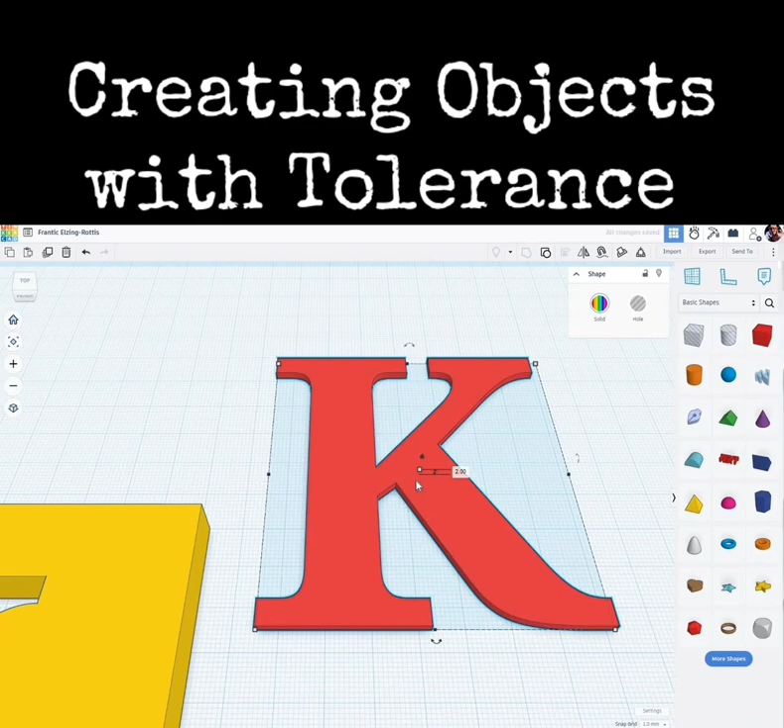Let's take this red part. Let's bring it out here. Let's move this yellow part for a moment. We want to turn this into an SVG so we can work with it. Going to make sure that's on the work plane there. While it's selected, I'm going to click Export.

Select SVG, and I'm just going to leave this oddball name here. Move that out of the way. I'm going to click on Import. I'm going to grab that SVG that I just made. I'm going to import that back in. Okay, there we have that.

Now this is exactly the same size, so at this point it still won't fit. So what we're going to do is first we're going to change the quality of this to 24. Now we're going to make a couple of duplicates to be able to trim some of this off. Now some of you might say, well, we can just take this letter and shrink it down. Well, I'm here to tell you that doesn't work, because if you start shrinking it, the scale doesn't fit. It just doesn't work right. So let's undo that. Let's bring it back over here.

All right, we're going to make a couple duplicates of this. So I'm going to select it. I'm going to create my first duplicate. There's my first. I'm going to turn that. I'm going to change the fill mode here. Now I want to make two of these here. The first one I'm going to call an outer line. I'm going to change this to, say, 0.25 millimeter.

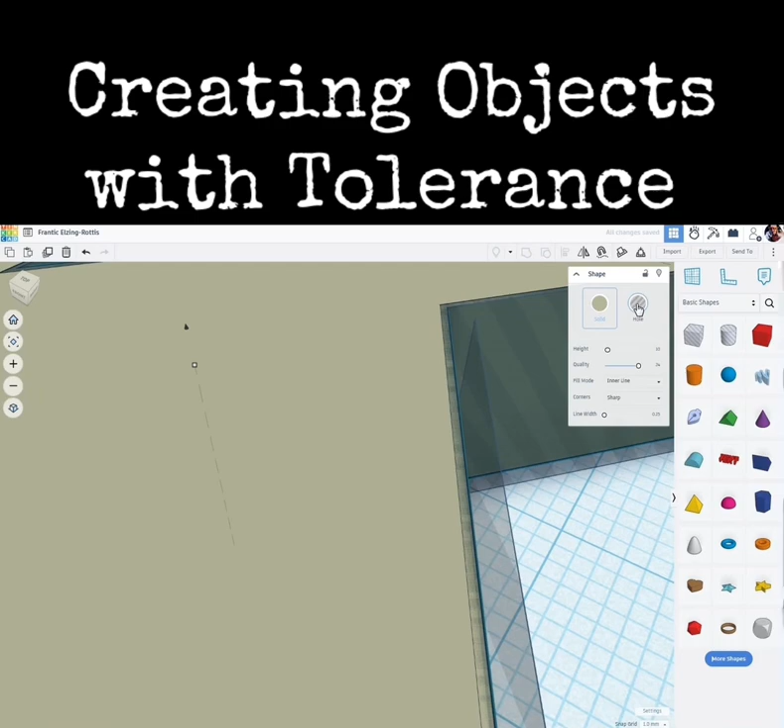And if we zoom in here, you can see our two parts. Here's our outer line. If I make that solid, you can see it. Here's our inner line. Zoom back out. I'm going to select all three of these. Going to group those together.

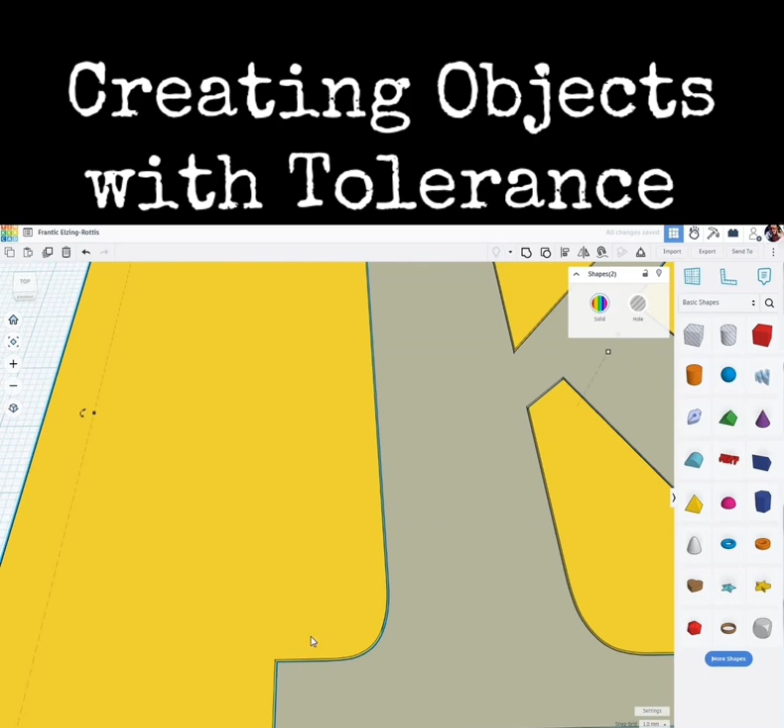There we go. Now let's realign it with this one. Okay, let's grab both of those, bring them over. Now if we zoom in here, you can see that I've built in a tolerance of 1/4 millimeter so that if you were to print these, they should slide together.

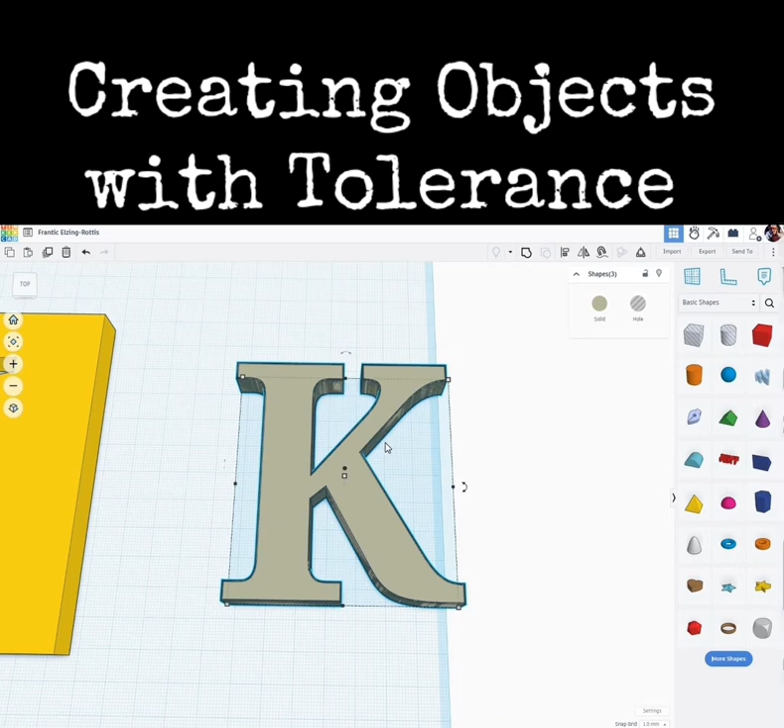Now, I want to show you the reason that I created that outer outline. Let's bring this back over here. Let's ungroup that for a moment. If you don't create that secondary outer outline and just do the inner outline, let's delete the outer one here, you'll see you end up with some really odd remnants. So this one is just our original K shape and the inner outline. And if you zoom in here, you see all these weird little remnants that get left behind. That's why I did that secondary outer outline.

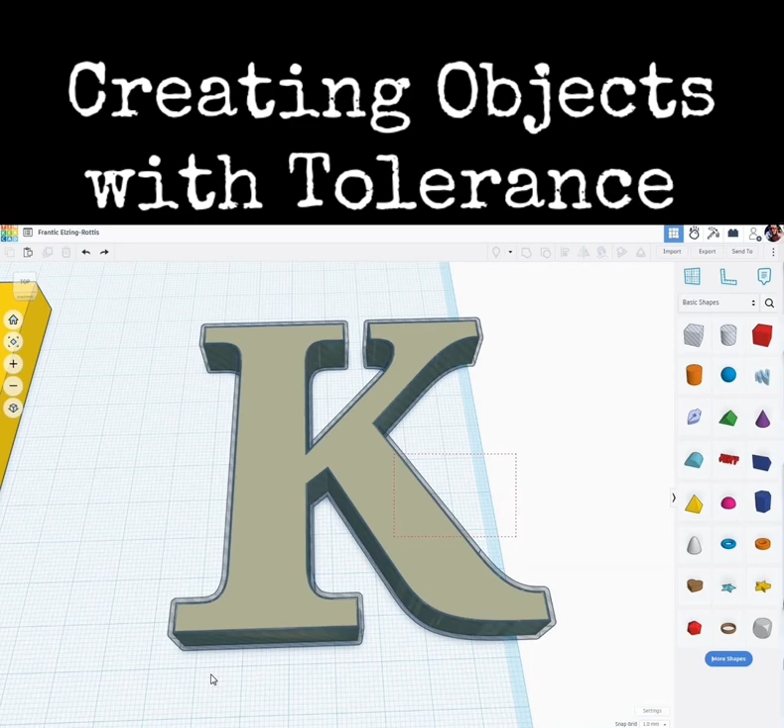Let's go ahead and undo all of that. So here we are back with the inner outline, outer outline, and then our original shape. Group those together. And although there is a little bit of oddness right there, this will still print and will fit right into this part.

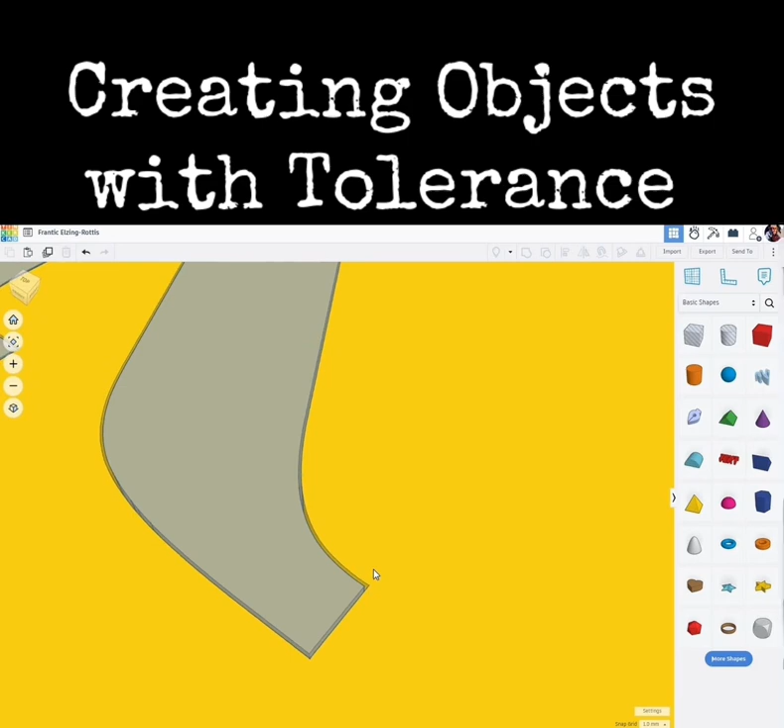So that's how you would do that. If you wanted to be able to create a part to fit inside of another part and leave yourself a little bit of a tolerance between parts, you could make an SVG out of it and then use an outer outline and an inner outline to take off a wee bit of the edge, and you don't have a scaling problem. So there's your TinkerCAD tip for the day.